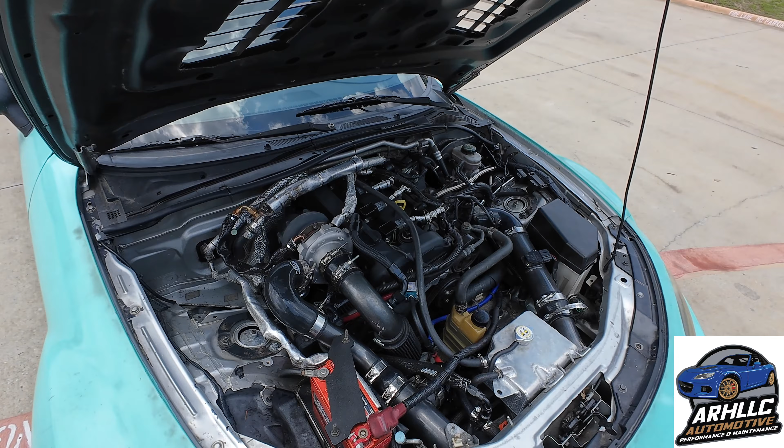We also have this silver NC here that has almost the exact same build, but we won't be getting that dyno today as it's still waiting on some stuff to come back from powder coating. Meanwhile, let's at least just take a peek over it. Now the priority of this car was for function, not for vanity, so it may not be the prettiest.

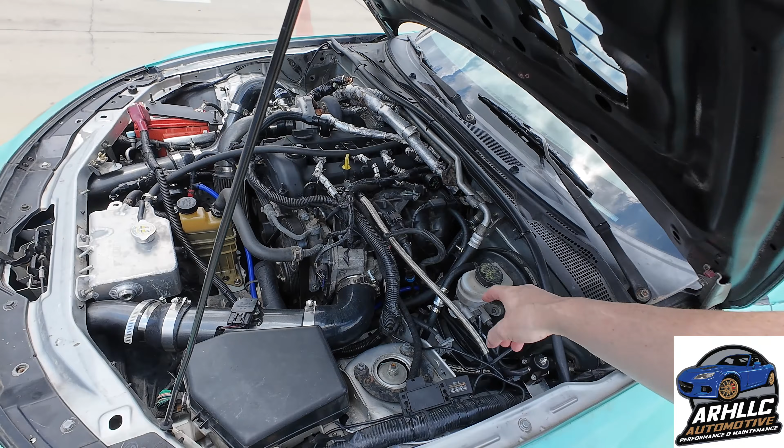We have our DW fuel pressure regulator over here. That's part of my fuel system that I offer on our website. It's the Radium fuel rail, and it converts the system to return, so it does reuse the stock fuel line to return back to the tank.

We just installed a ceramic valve cover. Ooh, it's still hot from earlier. Then we plumbed a 10 AN back to here. When he's ready, we can do a catch can pretty easily with this. It has my coolant upgrade lines, so these are 6 AN and they are wrapped in fire sleeve. We've done as much heat protection as we can around everything, including the alternator down there.

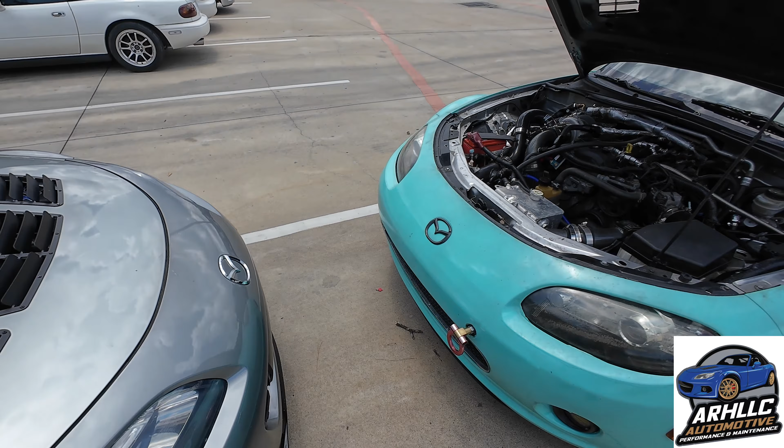And we also have installed, well, it's not visible, but on both of these cars, like I said, pretty much same build, it has the gigantic Mishimoto aluminum oil cooler that runs all the way across the front end. And it is using a MadFabWorks oil perch that allows us to have a temperature and pressure sensor via the Rotarytronics gauge that's in the center here.

And then we're also running the Innovate gauge for fail-safe boost control. Let's see. Oh, I'm sorry, I'm wearing sunglasses. I can't see this. This is invisible in sunglasses. So it has oil pressure, coolant temperature from OBD, and then oil temperature. So the pressure of the oil and temperature are coming off of the MadFabWorks perch. Pretty awesome. Let's go get this thing on the dyno.

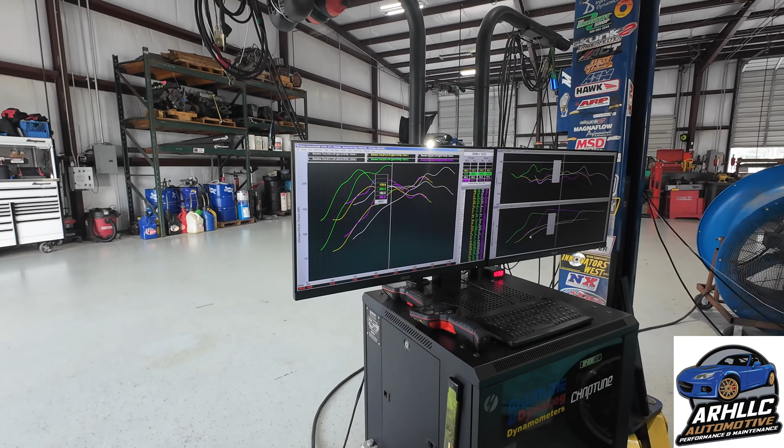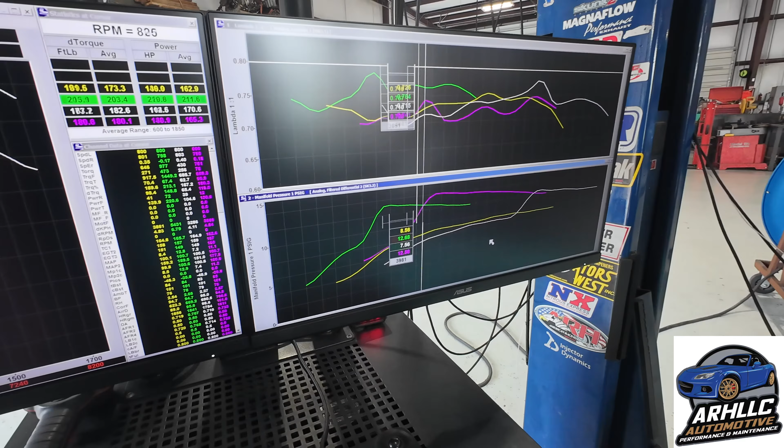We did pulls in 3rd, 4th, and 5th just for grins because we were getting some weird numbers. Check this out. Pull in 4th is in yellow. That's the PSI we were hitting, so somewhere in the 9-ish region. Then we did a pull in 3rd, which is the green. We did a pull in 5th, which gave us the white. And then we did another pull in 4th, which gave us purple. No settings were changed on the car at all.

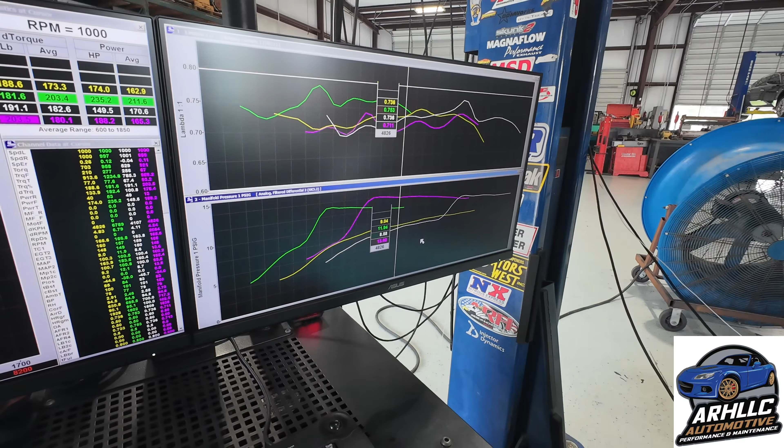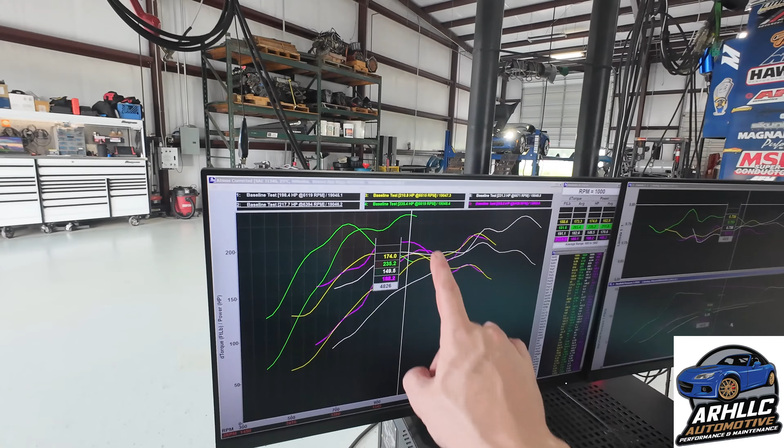Those are the AFR values we're getting. And these are our dyno graphs. Some really weird results we're getting, but we got up to 235 horsepower, but all the pulls in 4th gear were getting us about 210, which is very curious.

Great, so we're back here at the shop now, and PowerFab was kind enough to send over dyno graphs for all 4 of our pulls today. We did a pull in 4th gear, a pull in 3rd gear, 5th gear, and then another one in 4th gear. So let's have a look at these graphs.

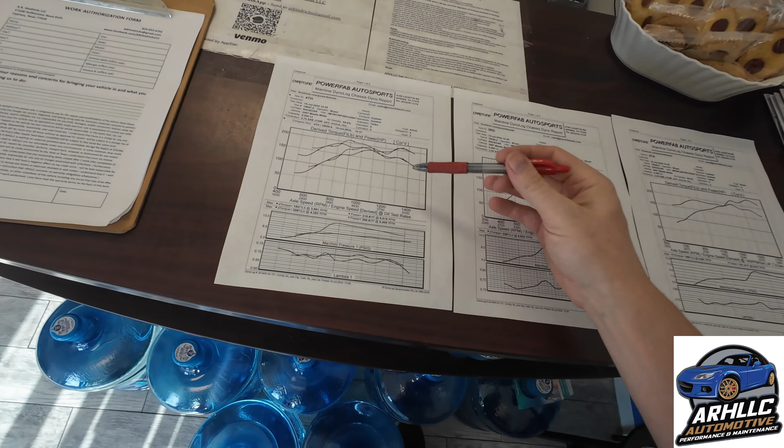So what we're looking at here, we have our torque value, we have our horsepower value, and then down here we have our boost value as well as a measured at the tailpipe AFR value.

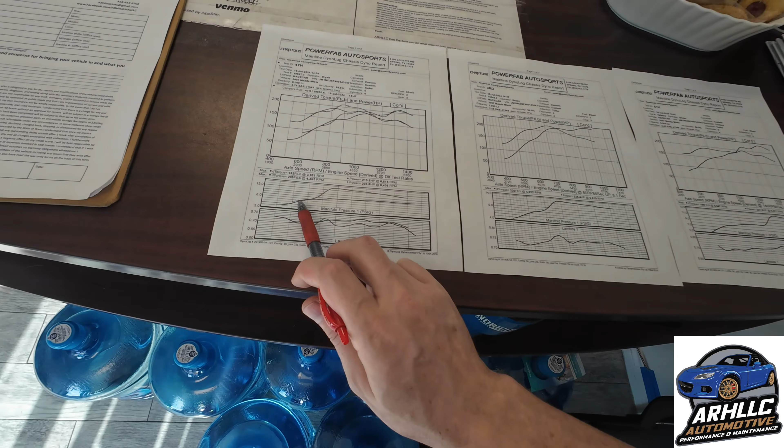What I'd like to point out first is the discrepancies of our boost values. Our first pull is this one right here. Notice how low that line is. That line looks like it's making somewhere about maybe 9-ish PSI. And it's pretty smooth, but it's 9 the whole way across. That doesn't really track because all of our data logs per what was on the computer show us making somewhere between 11 and 13 for just about all our pulls.

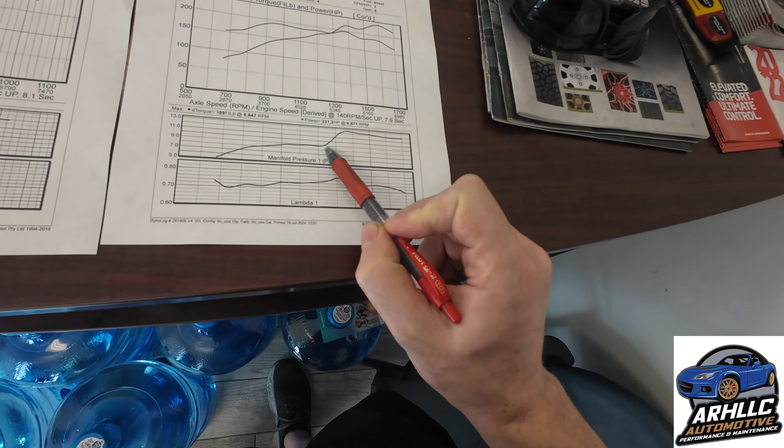Then we did a pull in 3rd gear, and look at that. The boost skyrockets up. It hits peak boost at a little shy of 5,000 RPM, and it looks like it's hitting close to 13-ish PSI, which is expectable. Then we go over to this one, and this is the 5th gear pull. The 5th gear pull waits a really long time and then it spikes up here at the end at about 5,600 RPM, and it's showing maybe 12.5-ish PSI.

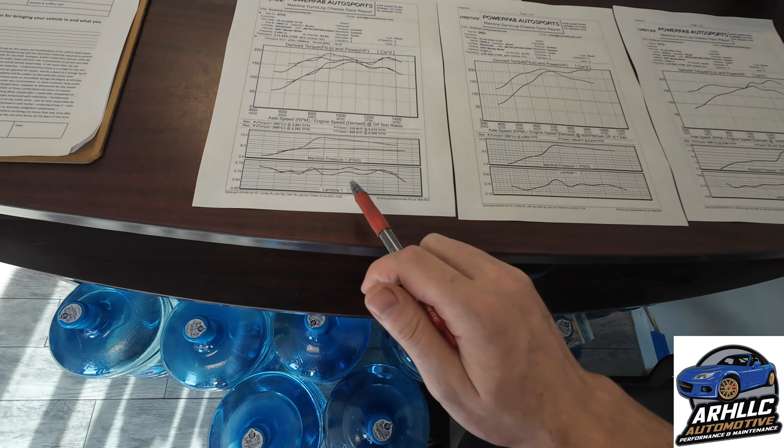Then we go back and we do another pull, again in 4th gear, and this one spikes up at about 4,300 RPM to 14 PSI. This is the same car back-to-back runs, so we did these runs all within about a 10-minute period.

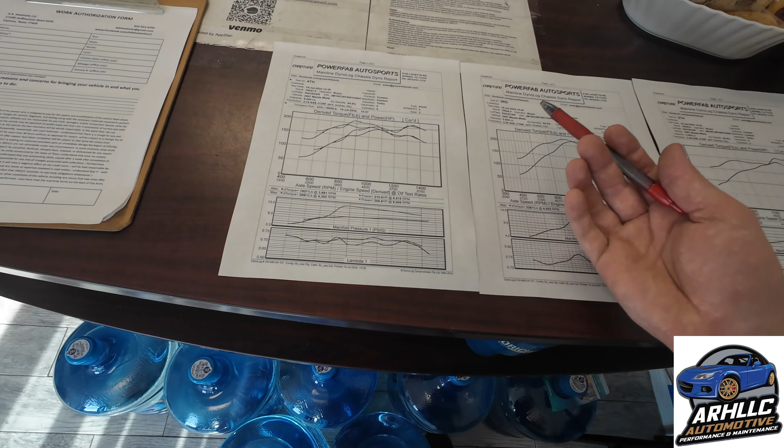Now let's also look at the horsepower values. The horsepower values here are extremely disappointing, but I believe they're deceptive, because if you go drive the car, you will absolutely disagree with the horsepower values we see here. The car doesn't drive like a 200 or even 230 horsepower car. It drives very well, like a 300 plus horsepower Miata. And I say this with experience of driving 300 plus horsepower Miatas, so that's why I want to go over this. Check out the dyno graphs here.

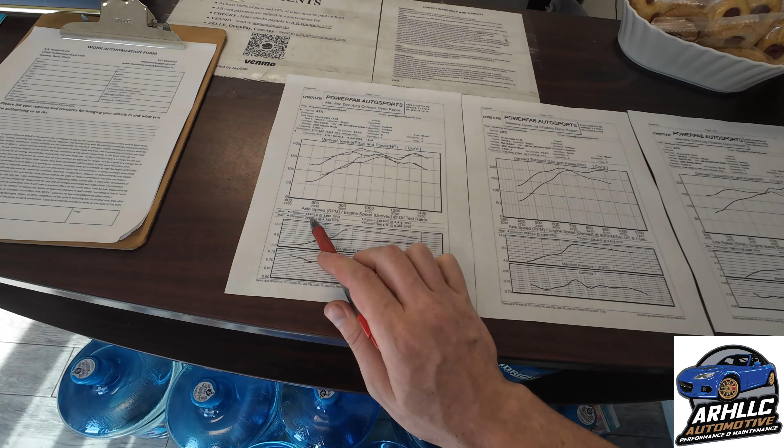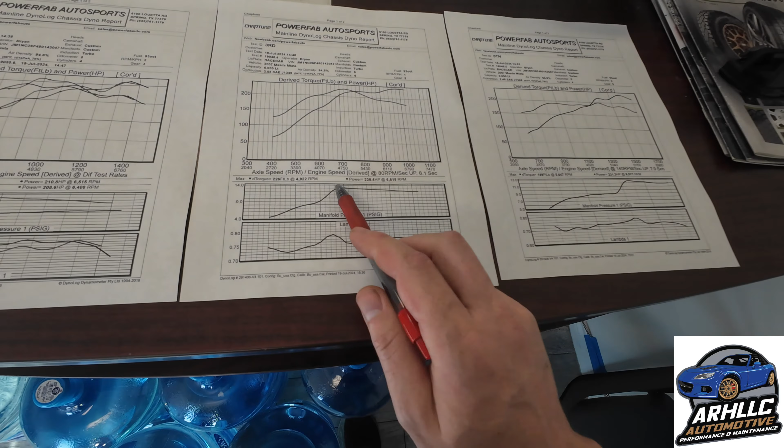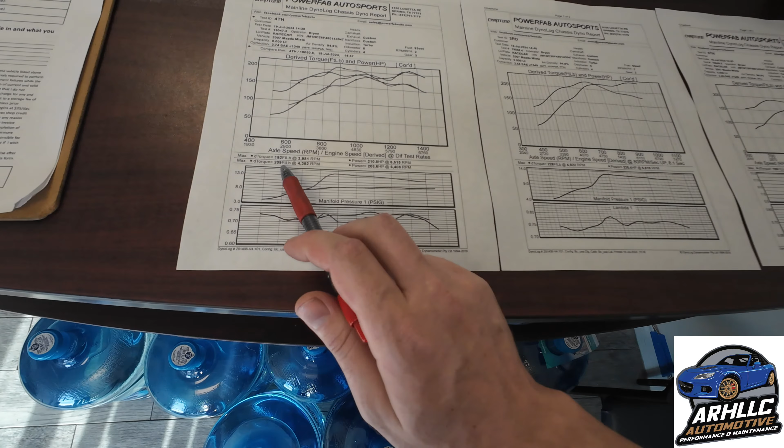We're showing that on our first pull with the low boost value we made 210 horsepower. And then on this pull, it shows that we made 235 horsepower. Then it shows we made 231 horsepower. But then we go back to this one, and our pull that had the most boost shows that we made a mere 208 horsepower, which is the lowest value.

So all of this is to say that we know by seeing the data and driving the car that something is wrong here. I can tell you that the data logs I have from EcuTek don't match these values at all as far as boost response, and driving the car as well. The boost doesn't lag to come in, it's very consistent, and the car is very responsive. As well as, like I said, it pulls really, really hard.

So that tells me right away it's definitely not a 210 horsepower build, nor 235. But also, seeing these back to back, seeing them be this far apart indicates that we have a problem. So I don't know what the customer's going to want to do at this point, because we did speak to them and they said, hey, if you say that the values are to be thrown out, then let's not worry about them. If the car drives phenomenally, I'll take the car. But if before the customer can come pick the car up I can take it to another dyno for a second opinion, then I'd like to.

All this is to say, remember that not all dynos are going to read exactly the same. Not every car is going to read exactly the same. And also, there's a chance that the dyno could be off. This definitely gives me the feeling that the dyno is off, and that's why I'd like to go over this.